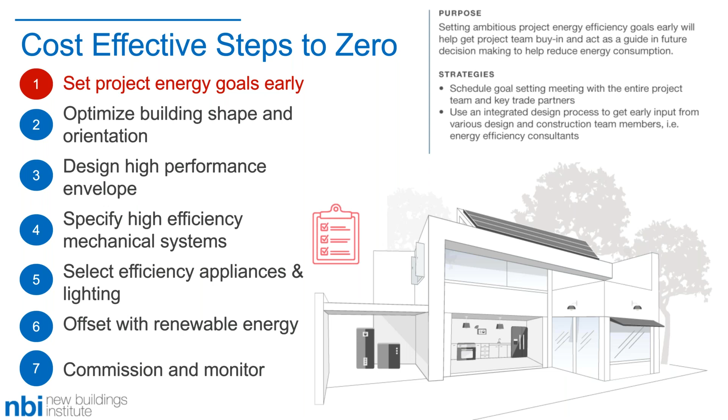The second step is to optimize the building shape and orientation. And this really starts with studying the site and looking at bioclimatic analysis, understanding the wind patterns, how much rainfall is on the site, what is the sunlight possible, and how can you take advantage of what's naturally there to light, heat, and cool the home. So how can we not use electric energy, but actually use nature to do what we need to do within the home? So simple shapes really help with constructability.

Sheridan is a great example of that. Trying not to be too complicated with the shape is often helpful, as well as looking at energy modeling, doing that energy modeling early, and making sure that you have the right orientation or the optimal orientation for your site and for what's possible for energy efficiency.

Another thing to consider is the solar budget. So once you've known your shape and you know what's possible, how much energy can you actually collect from solar on site? And with that information, it can help you also set a target for how much energy that building can consume over the course of the year.

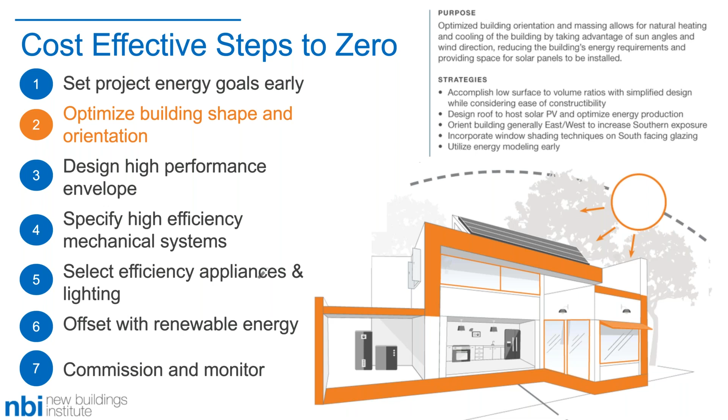The third step is design for high performance envelope. And the three most important things here to consider is a tight envelope, a lot of insulation, and minimize thermal bridging. And we do this all to reduce energy use and minimize the heat transfer through the building's envelope. Doing so allows us to reduce the HVAC size and minimize first costs associated with that HVAC system.

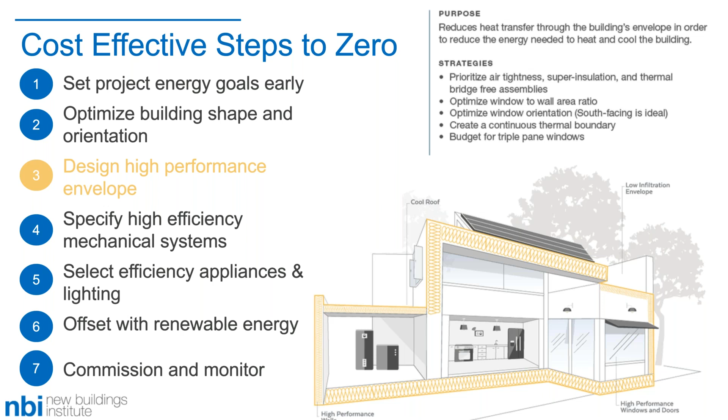We also want to look at the window to wall ratio and make sure that we are being intentional about the size of the windows, where the windows are facing, and minimizing any heat transfer through the envelope, or thoughtfully minimizing heat transfer.

Fourth is specifying high efficiency mechanical systems. As I said before, this really starts with the envelope. By making that envelope a tight envelope, we can minimize the infiltration through there and right size the HVAC system, saving first costs.

We also want to control for ventilation. In many cases, you'll see in zero energy homes that there's a separate heating system from the ventilation system. This is because in a tighter home, you need to control where that ventilation comes from. It's not just infiltrating from holes in the wall, but it's intentional. It's also important to consider comfort and health, so it's not just a matter of downsizing the HVAC system and telling everybody to put a sweater on, but making sure that it's actually comfortable and that there's proper ventilation to improve the indoor air quality of the home.

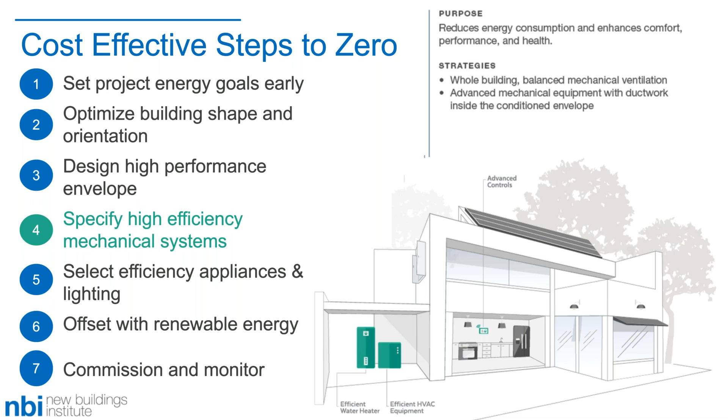The fifth step is selecting efficiency appliances and lighting. All LED lighting is pretty common these days. Most people know about Energy Star appliances and equipment, so those are becoming easier to purchase. It's also important to consider that when you reduce your heating and cooling, which is often the highest energy intensity in our home, that actually increases the pie of how much water heating and plug loads you're using. So you want to consider those as well.

With hot water, we're seeing more heat pump water heaters coming onto the market that are right priced for individual homes, as well as making sure that the plumbing is actually being designed. So the distribution of the plumbing is designed in a way that it's using less energy because you have smaller runs to each hot water source.

The sixth step is offsetting with renewable energy. Once the energy use has been optimized through steps 1 through 5, we want to offset that energy with renewables. This is where that early analysis really pays off, because we've taken a look at the site, we know what's available there, and we've optimized our building for efficiency.

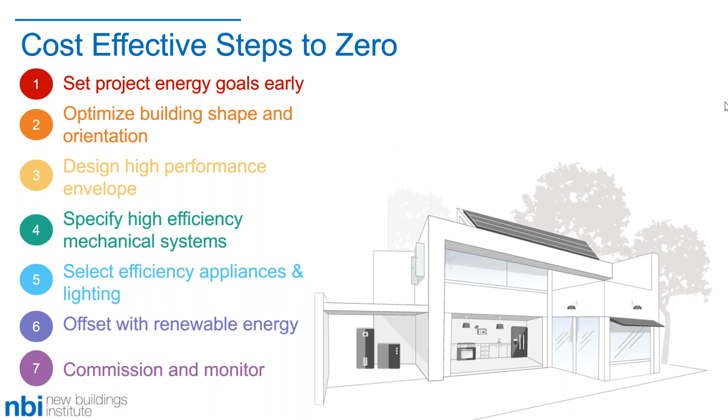So these are the 7 steps to cost-effective zero. As I mentioned, these are some of the essential things to consider. There's many more, and we'll get into that next with the case study. So I want to hand it over to Jonathan right now so that he can share more about the Sheridan case study.

Thank you. Thanks, Webly. Good afternoon, everybody. I just want to give a quick introduction to the rest of our panelists. I'm joined with Haley Hardwick Whitman with One Neighborhood Builders, and she's a Rose Fellow, and John Erickson with CLEAResult, who is our verifier and acting as our passive house consultant. My name is Jonathan Knowles. I'm a professor of architecture at Rhode Island School of Design and an architect with Briggs & Knowles Architecture and Design in Providence.

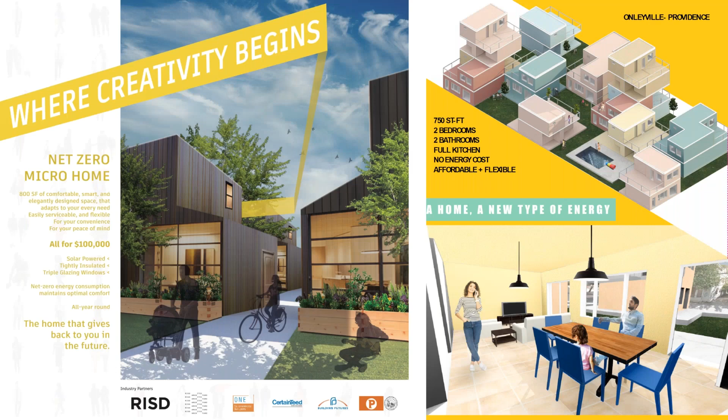This project really started with the city reaching out to the Department of Architecture at RISD because of our successful relationship with a number of other projects. They were looking to consolidate unused lots in the city and turn those over to not-for-profit developers to establish zero energy affordable housing, which is a really admirable goal and one that led me to start a design studio working with the city. And the city introduced us to One Neighborhood Builders, the developer and contractor, to actually get this done.

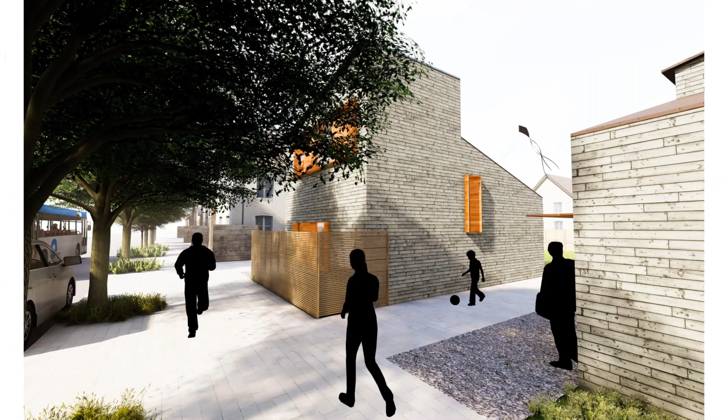The studio started with 2 teams. We looked at houses as modules and in aggregate, so they could actually join together if need be. This is the first unit, so we're calling it now Unit A. This is the first team and the second team of the 2 prototypes.

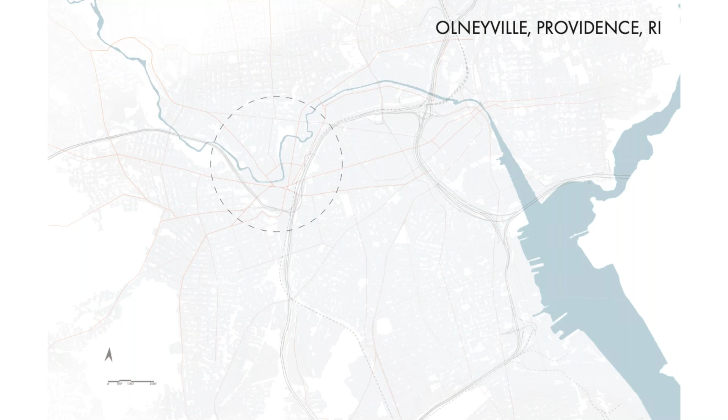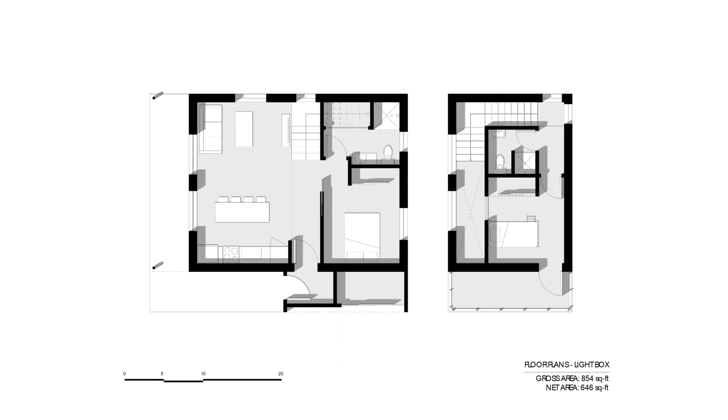The plans are actually very straightforward, but generous for a 950 square foot home. We have a great room, master bed downstairs and bath, full bath, and then upstairs we have a smaller bedroom and a half bath at the top of the stairs. You can see our model, 2 big porches, one to the south and one off the bedroom on the second floor, that could potentially be filled in to become a sunroom.

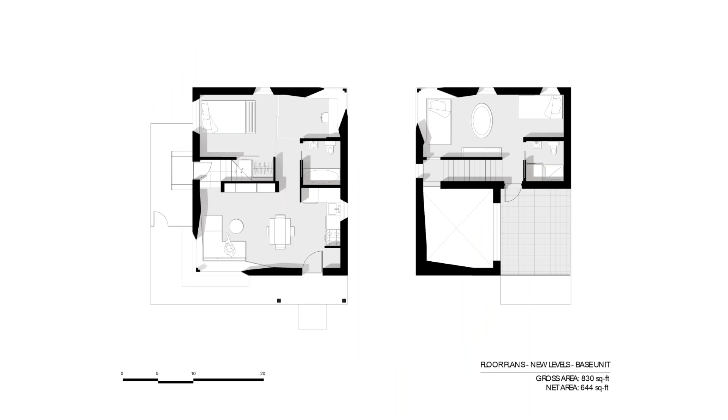So this was something my students were interested in, is how these houses could transform over time. The second prototype was called New Levels, and again, that was based on a project that could change over time. You can see a large double height space in the living room and a large second floor terrace, and their idea was that this could be infilled in the future.

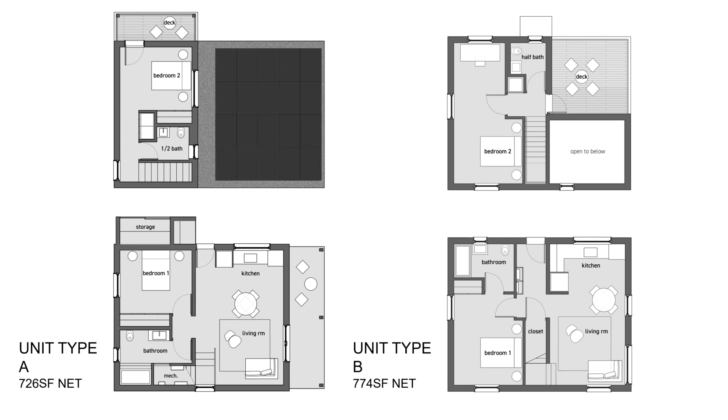And become either a ground floor apartment and an upstairs separate unit. The projects have evolved a little bit, but not that much to current. You can see they're very similar, Unit A on the left, Unit B on the right. They're still roughly about 950, 960 gross square feet. Unit A is now almost done. Unit B is slated to be done this spring.

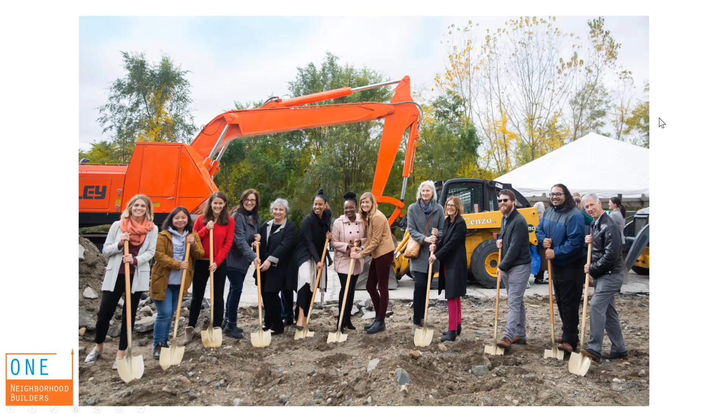Hi, everyone. My name is Haley Hardwick-Whitman. I'm the general contractor and project manager of this project for One Neighborhood Builders. This is a picture of us, our organization at the groundbreaking last fall.

One Neighborhood Builders is a community development corporation that develops affordable housing and works to engage the community in the greater Providence area to cultivate healthy, vibrant, and safe communities.

So these were the main goals of the project: to ultimately serve as a replicable model for the future of affordable housing. We wanted to demonstrate that sustainable, healthy homes can be attainable for everyone.

We are also trying to address 4 realities within the housing market. The first one being that larger homes and larger plots of land are expensive to build and maintain, especially in the urban core area where we are in Olneyville, due to property taxes, which add a substantial burden to housing affordability. The second one being the gap between available public subsidies and what it actually costs to build or buy a home affordably is just expanding.

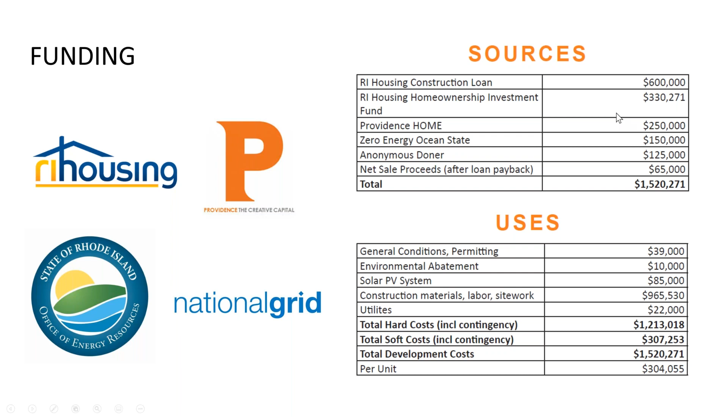costs are typically geared towards 120 AMI and above. So although the small homes were designed with small lots in mind, a recent HUD neighborhood assessment had been completed and deemed this area at 35 Sheridan Street to be underutilized, and it was a priority for Olneyville to revitalize. It's adjacent to the Woonasquatucket River bike path, which is a great asset for the community, and this area was just vacant brownfield.

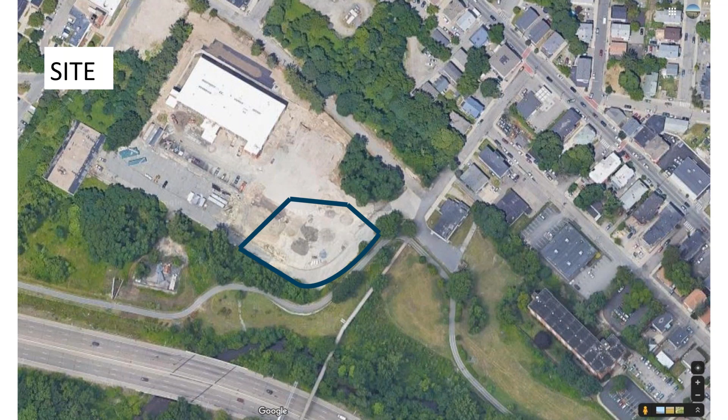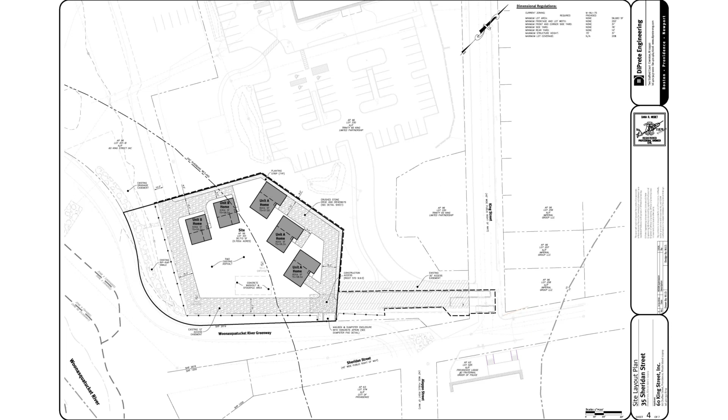So the students had conducted some preliminary solar studies once we chose this lot to help determine the placement of the homes. This arrangement was further refined to create an inclusive semicircle shape so all the neighbors could be visible and have access to this shared green space in the middle.

So we ended up with 78 panels total, and each panel is 320 watts. So the entire system is 24.96 kilowatts.

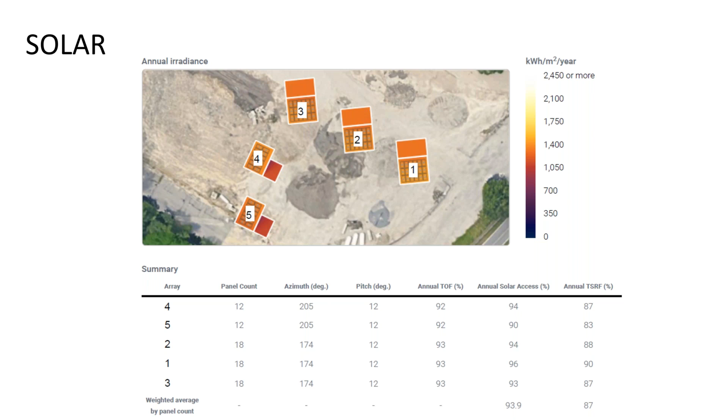This project, as you can see by these numbers, is projected to be net positive energy. It's estimated to consume 5,568 kilowatt hours and estimated to produce

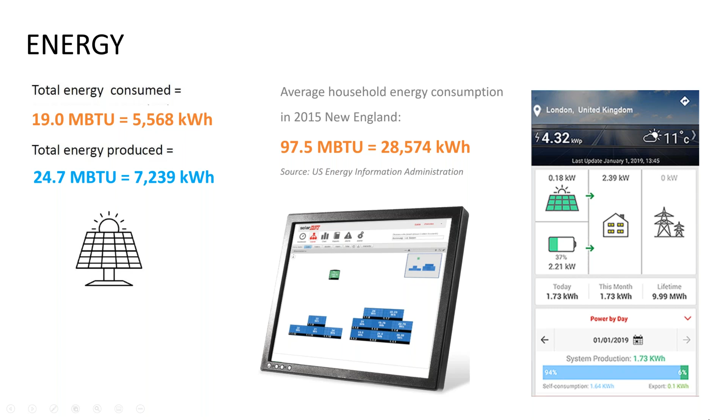Then the next section, we're going to go into the main building elements that allow for the project to be Passive House certified as well as net zero. I'm just going to give an overview, and then Jonathan can explain how they're implemented.

So optimizing solar gain for the climate has to do with selecting the right window performance that makes sense for orientation. Continuous insulation means minimal thermal bridging along the building exterior, or building envelope. Having an airtight building enclosure—John will talk about blower door tests that we conducted. Balancing the heat and moisture recovery ventilation: having a really tight building, it's important to have really excellent air exchange, which we do through our ERV.

And finally, having an efficient, minimally sized active system lessens the energy demand on the project. One additional feature, if you'll notice in the diagrams, is the shallow frost footing, which many municipalities are unfamiliar with, but the City of Providence approved. That resulted in basically a slab on grade with an insulative skirt, where we didn't have to go down 4 feet to the frost line, but went horizontally 4 feet to take advantage of the Earth's energy. This was somewhat unique because it's a major cost reduction measure for a passive house.

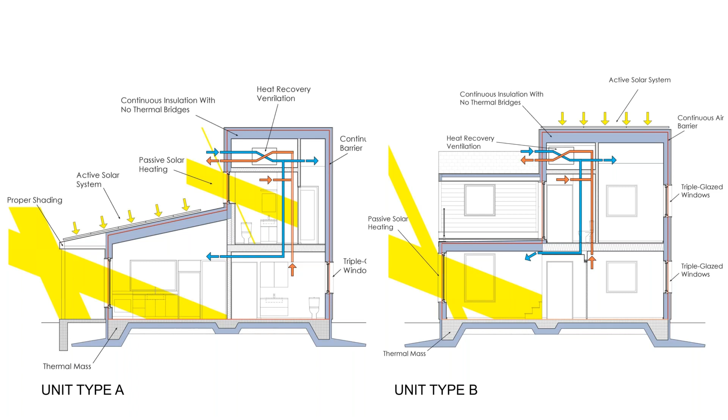So we'll pass it off to John Erickson, who's been working with us on site with the contractors to ensure the passive house details are implemented.

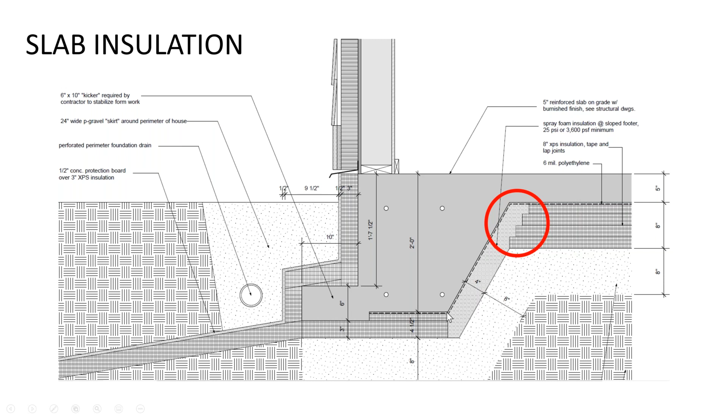So Jonathan mentioned the frost protected shallow footing, and here's his detail. You'll see this wing of 3 inches of XPS that essentially moves the frost line closer to the surface. On this detail, you can see R40 underneath the slab, and then R15 around the perimeter here.

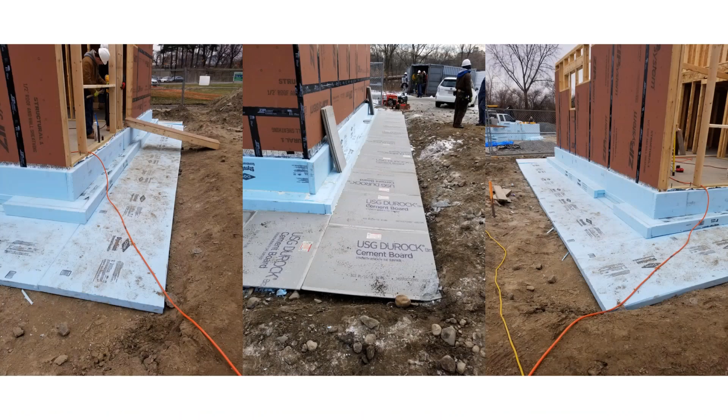In order to get this correct, they used spray foam on the perimeter like this, and out in the field you can see the 2 inches stacked, 4 sheets stacked of 2 inches for R40 out in the center. Here's a photo of the wings that Jonathan mentioned on the footing before it's backfilled, so you can get an idea of what that looks like. You can see the cement board on top that serves as protection, but that cement board also comes up the side and can be used later for applying the stucco coat to the exterior of the footing of the slab.

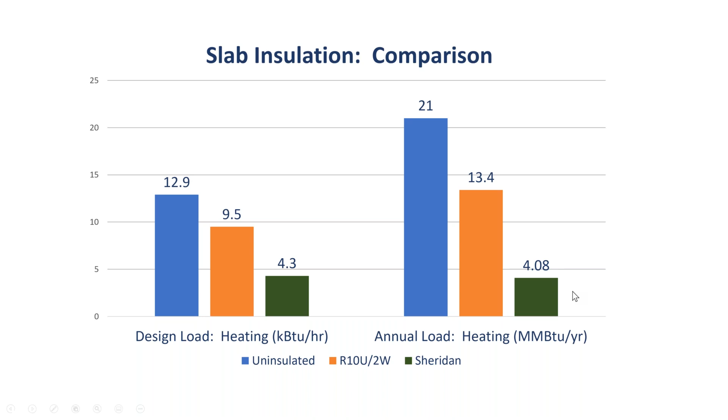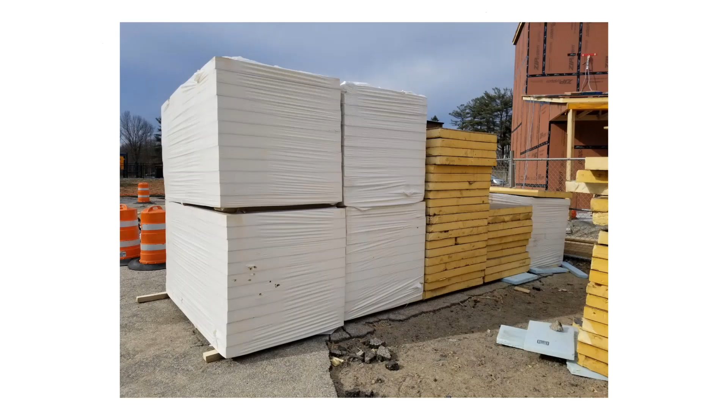Another factor to building this robust shell is not just using a lot of insulation, but making sure you've got a layer of continuous insulation included somewhere in the assembly. This was accomplished with 4 inches of exterior polyiso on the outside. For this project, one neighborhood used a company that sells repurposed polyiso that they pull off of commercial buildings.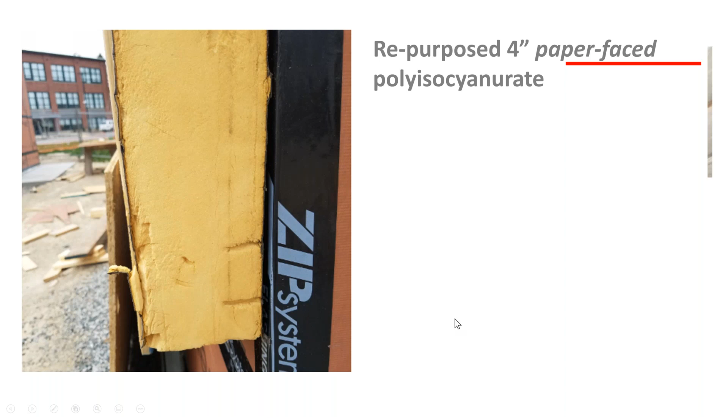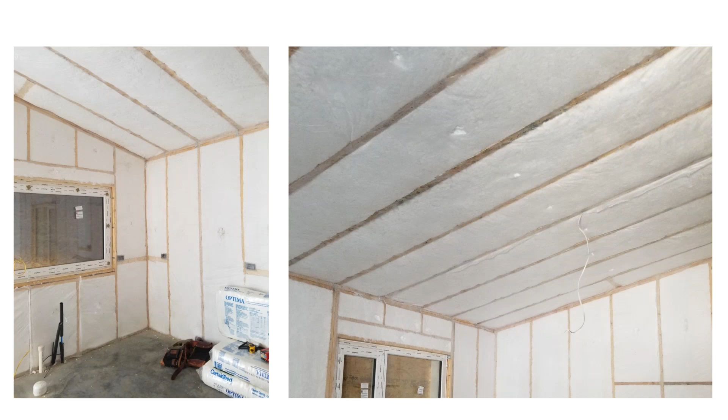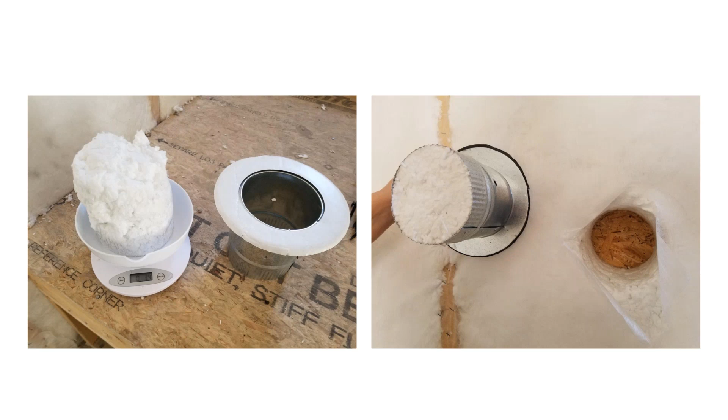So the interior framing insulation is blown fiberglass. With the fiberglass, as with all dense pack products, you want to weigh it and make sure it's being installed at the correct density, because the density affects not only the R value, but if it's installed too loose, it can settle and create gaps up at the top of the framing bays.

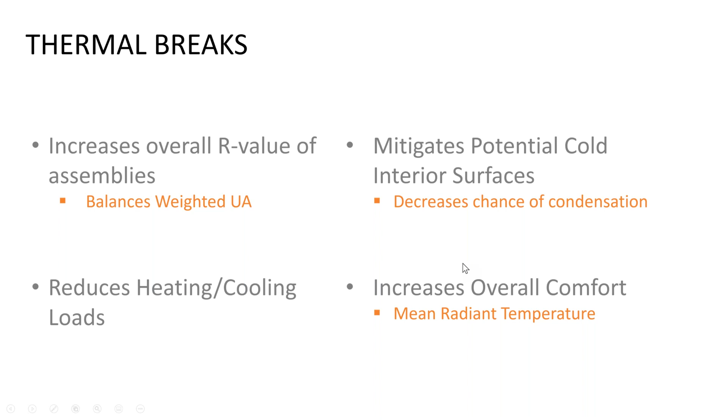Regarding the importance of thermal breaks, which Webley mentioned earlier - when you're creating thermal breaks, yes, you're increasing the overall weighted UA of an assembly and reducing loads, but you're also mitigating cold surfaces. For Passive House, they recommend that your interior surfaces are no greater than 7.2 degrees Fahrenheit from your thermostat set point. Putting in good windows and mitigating these thermal bridges is how you achieve that, and the end result is that the house is going to be much more comfortable.

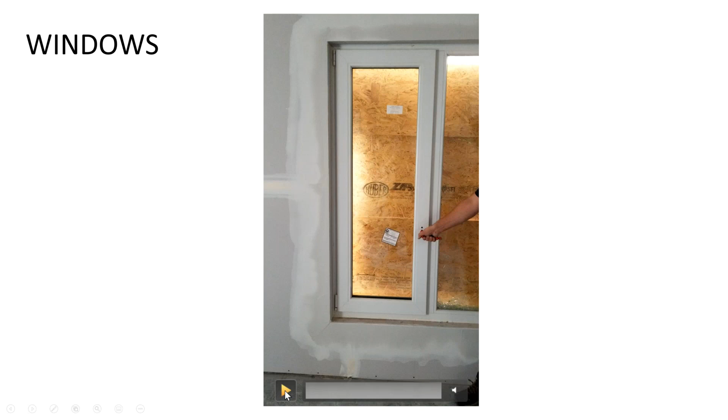This is an example of the windows installed at Sheridan, which is a Zola UPVC window. This one is a tilt and turn. We put together a short video to show you how these windows work. These windows are manufactured in Poland.

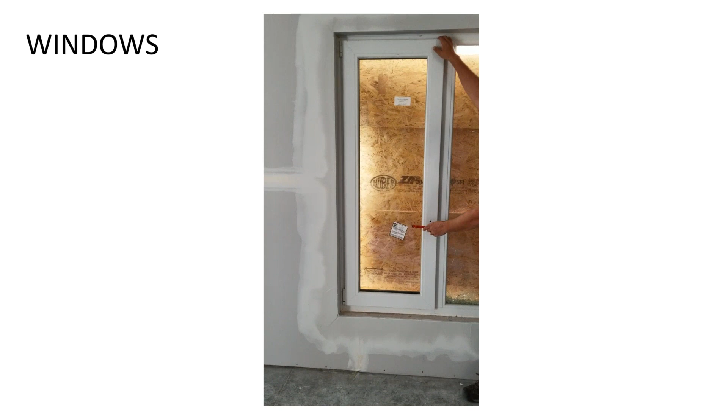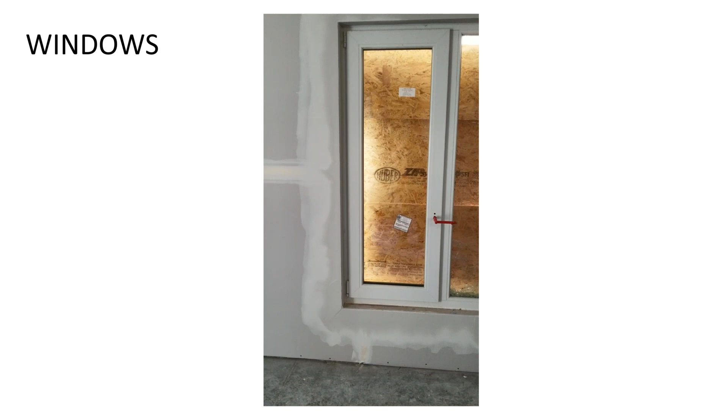The nice thing about these windows is that you can vent the house when it's raining outside by just using the tilt feature.

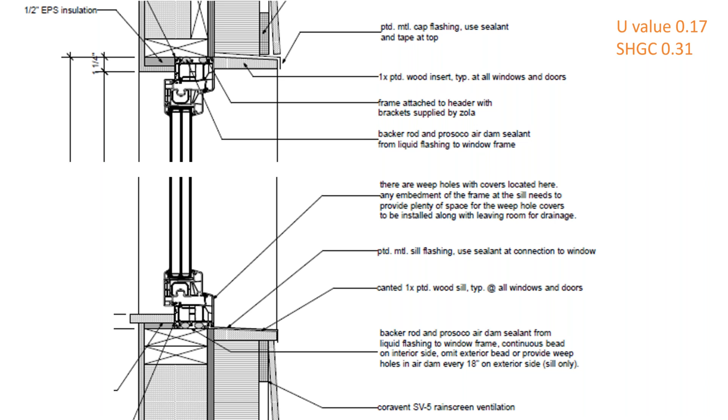One of the other really important pieces to lowering your loads and creating a very robust shell is having a very sound air barrier that is continuous. For Passive House, the air tightness requirement is 0.05 CFM50 per square foot of shell, which is a very low number for most traditional builders.

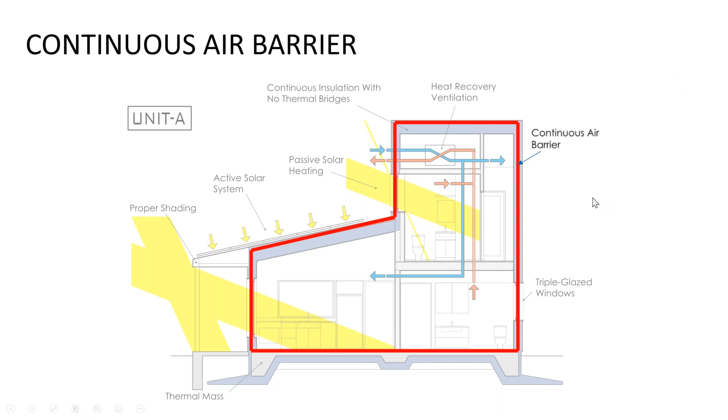In order to achieve that at Sheridan, the technique they used is the air barrier goes up and over the top using zip wall and zip sheathing. So the only place to be concerned about accidental air leakage, once you have all of the walls and ceilings taped and positively air sealed, is the connection between the sill plate and the concrete.

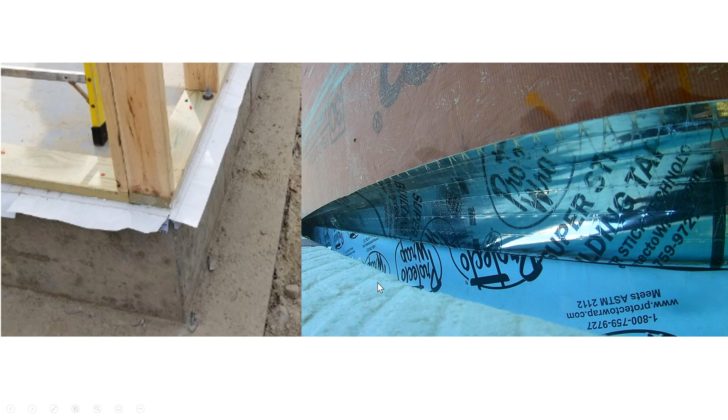What they used here is this product called Triple Guard, which is a traditional sill seal, but it's got two folds of tape, one that comes up onto the sheathing, one that goes down to the concrete. You put the sill seal in between, you can see it here, between the plate and the concrete. Once you have your sheathing on, you stick this tape up and down, and now you've got a solid positive connection between those two materials.

Sill sealer alone will eventually not work as well as when it's originally installed, because the wood will shrink. So this is a positive connection that you know will last.

So these are my midpoint blower door numbers for the first three buildings. Building 1 was 96 CFM, building 2 was about 62, building 3 was 43. You can see that the building practices are improving as they go, and they're picking up, figuring out where they're making mistakes.

By the way, this 43 CFM is a very, very low number. This is an excellent midpoint blower door number, much lower than the allowable maximum, which for this particular house is about 177 CFM, which is good because they'll be adding more.

This is a shell test. This is the house plywooded and taped with no windows and no doors, essentially, and obviously no other mechanical penetrations. So as they add windows and mechanical penetrations, there's going to be more leakage. You want to make sure you have this nice buffer so that you stay underneath that 177 CFM.

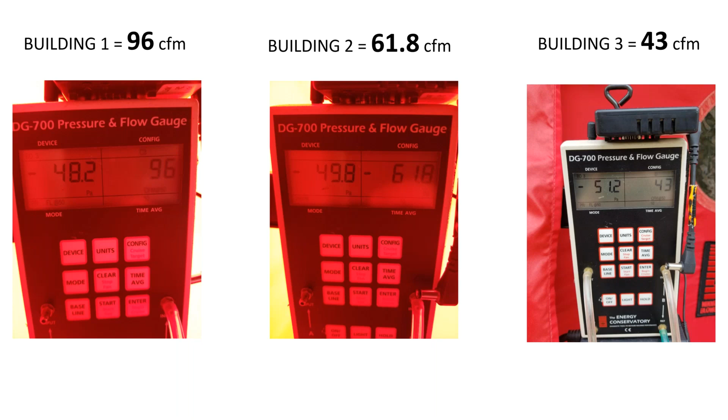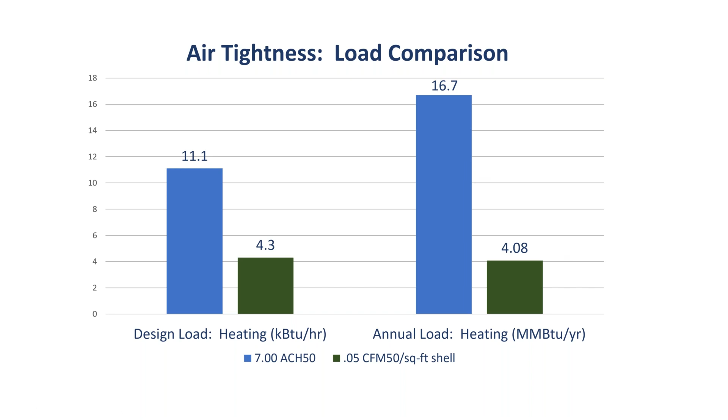I did the same thing for air tightness. Everything else being equal, if you set these houses at Rhode Island code minimum, which is 7 ACH50, these are the differences in the design load and annual loads. This is remarkable to me: this is a 12 million BTU reduction just by building to passive house air tightness standards.

This is the effective leakage area. If you were to take all of the leaks and holes in the shell and combine them into one hole, how big would it be? That is called the effective leakage area.

Over here on the right, you can see if you added all the holes together in the building that blew 43 CFM, that would be about 2.4 square inches. The maximum allowable for PHIUS is about 9.7 square inches, and the Rhode Island maximum allowable for code minimum is almost 58 square inches, which is almost like having an open window, or at least a halfway open window. So it's a huge difference, let's say that.

And you can see what that means to the loads in the last slide I just showed you.

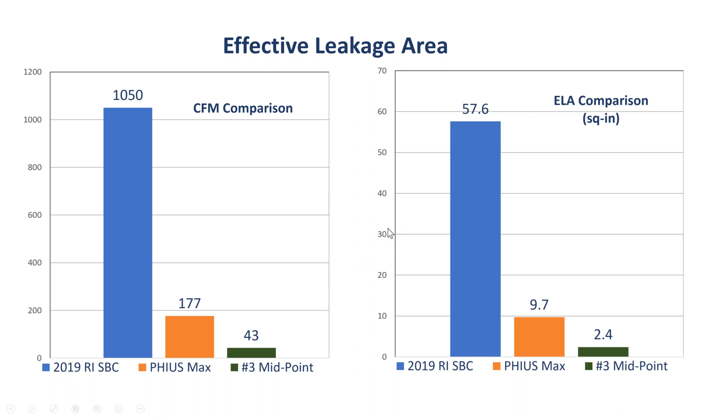Mechanical ventilation is required not just for PHIUS and really tight houses, but it's essentially required for pretty much all new residential construction. Here in Rhode Island, the mechanical code states that if you blow a 5 ACH50 or less in your house, then you need to have mechanical ventilation of some kind.

So this type of ventilation is not just for really tight houses, but in a passive house and in really tight houses, it becomes sort of extra important.

And the strategy at Sheridan for ventilation is this ERV, which is stacked above the second floor bathroom, centralized in the house so that the duct runs could be as short and straight as possible.

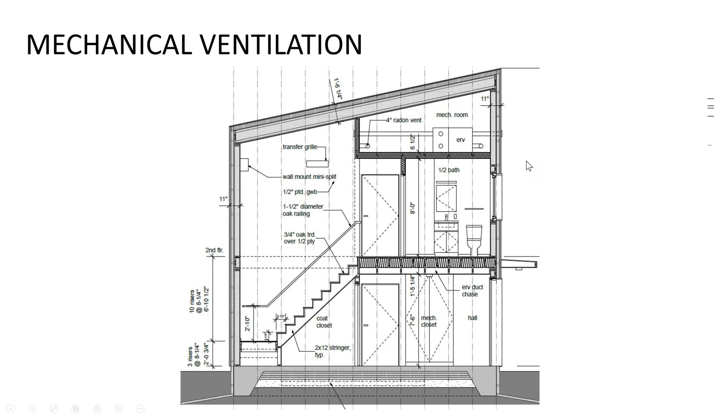Another nice detail that Jonathan included in this design is that the exhaust and supply are around the corner from each other. So it's a nice detail to keep them apart that way.

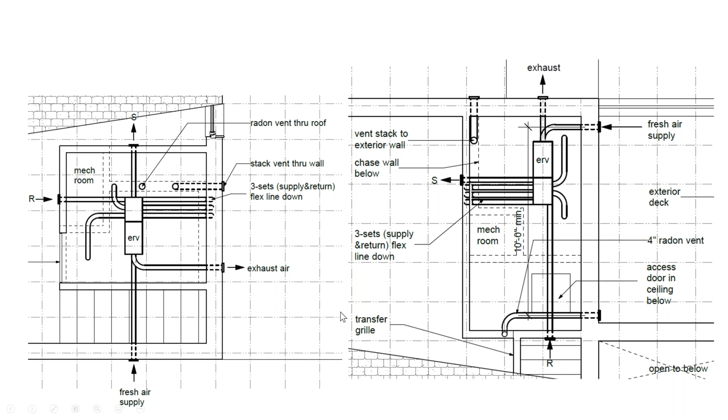But the reason you want to have short, straight runs in your ventilation system, in particular why it's so critical for passive house certification, is because there are requirements for your ventilation system exhaust for your bathrooms and for your kitchen, and you need to hit those numbers.

It's 20 CFM exhaust or 50 intermittent for bathrooms, and 25 and 100 for kitchens. If you're not getting those exhaust numbers in your bathrooms and kitchen and you need to boost up your system, that's going to, number one, use more energy to run the fan at a higher speed, and number two, bring down the efficiency of the entire system, which is going to hurt your energy model.

So here, there were a few mistakes with the ducting at Sheridan that got corrected. You could see this long, unnecessary sweep and these couple extra 90s here. You want it to look more like this, nice and straight, a single long sweep like this.

This way you're reducing friction in the ductwork, and hopefully you're able to run your ERV at the lowest setting and still achieve the exhaust flows that you need.

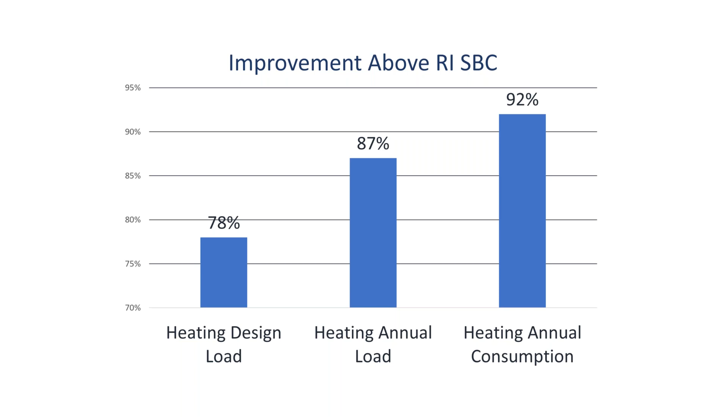So this is without solar panels, and this 92% reduction in annual heating consumption is pretty dramatic when you consider that the main thing happening here is very airtight construction, extra insulation, and good windows. Those are kind of like the big three things that are making this number so high.

So I did a quick little calculation on this because I thought it'd be interesting. The amount of energy that would be needed to heat one of these houses set to state code minimums for 50 years would heat the same house at passive house certification for 580 years.

And the projected annual cost for heating one of these houses is about $126 a year. And I think that's it.

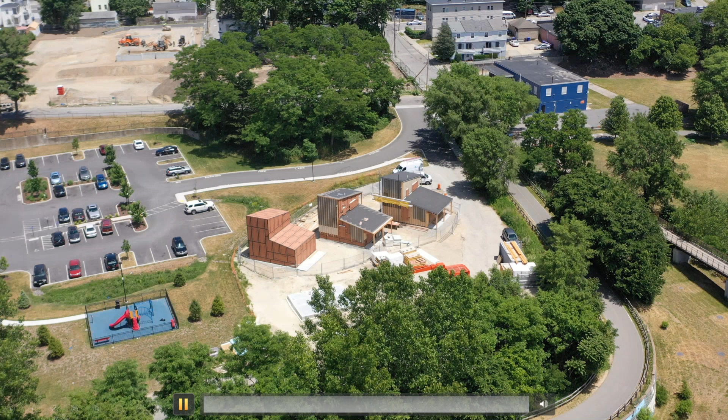This is a drone video that we have of the site here that I'm going to start. And I think that now is a good time for questions, maybe.

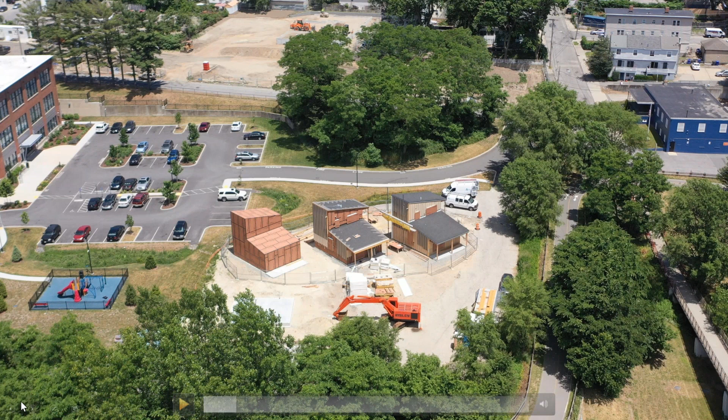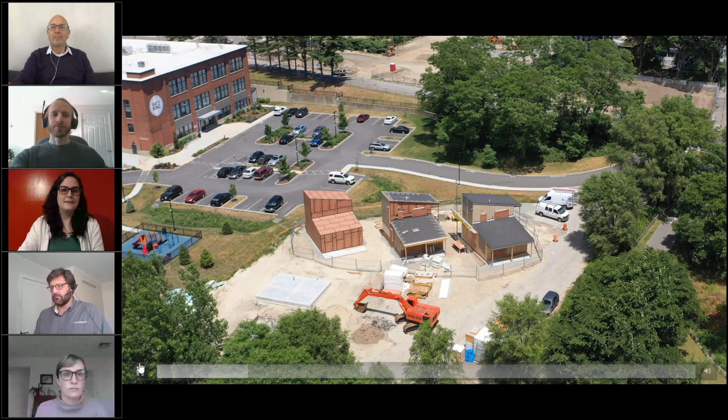I have a couple of questions that have come in. The first question is for Haley. Haley, what are some of the unique features that have been important to educate the home buyers about the homes?

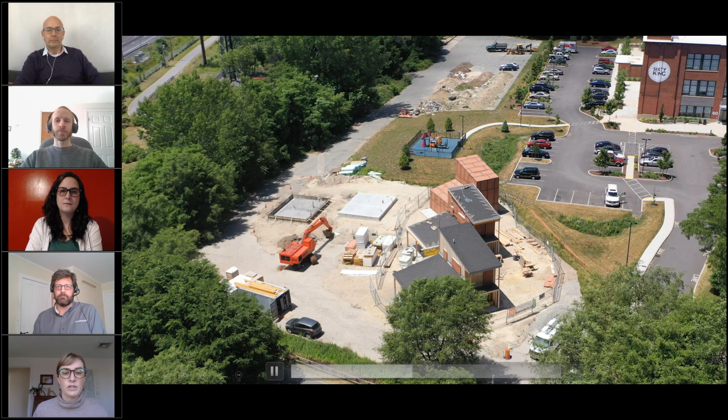That's a really good question. Before I started, One Neighborhood Builders conducted a few focus groups to explain our concept and get feedback from the community in terms of shaping the design. As they've been built, people bike by and stop to ask questions, and everyone thinks they look really cool, but there's a knowledge gap. People need to be convinced that less space is better, because the American dream is bigger is better. So the main hurdle was explaining that you're getting a really high quality home with amazing energy efficiency and air quality that will last forever. It's quality over quantity that we're trying to convey.

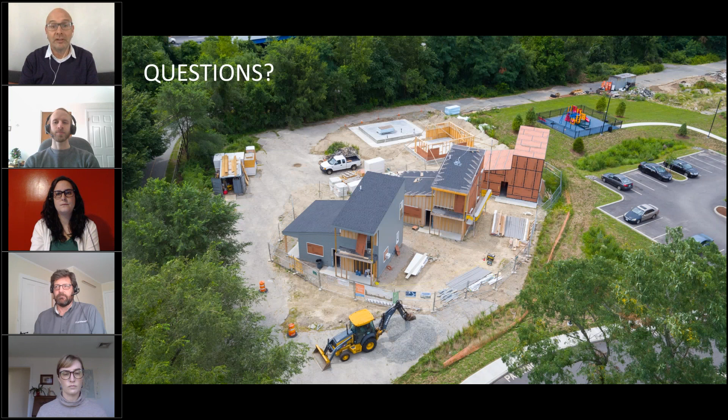Great, thank you. Second question is for Jonathan: what design obstacles made it more difficult to design to zero net energy? It really wasn't any obstacles, it was a goal from the beginning. As you outlined in your 7 points, we did exactly that. Our students were running WUFI Passive all the way along to make sure we hit our targets. We didn't send it into Passive House US until the working drawings were complete for certification, but we were using the design tools throughout. It is a little difficult to do a passive house with such a small volume, but we've done it, with the 3 simple strategies: airtight, super insulated exterior, and really good windows. One Neighborhood Builders was on board, and we were able to get it done.

So I have an added obstacle - working with Building Futures, which is a training program. This was their first passive house. So before we even started, we had John Erickson come in and review some of the atypical details they were going to be constructing, which is different and may seem over the top from the way you conventionally build. So John, did any of the team members from Building Futures struggle with any of those details?

Well, I think that they knocked it out of the park, to be honest with you. If you think back on the slide of the midpoint blower doors that I did, where they were getting progressively better, starting from 96 CFM and moving down to 43. Even that first building at 96 CFM is still half of the required minimum for passive house allowable, which is excellent for a first-time build. And then 43 CFM on a midpoint, that's a really, really low number. That might be, from my experience, the lowest one I've seen so far anywhere. So it's excellent.

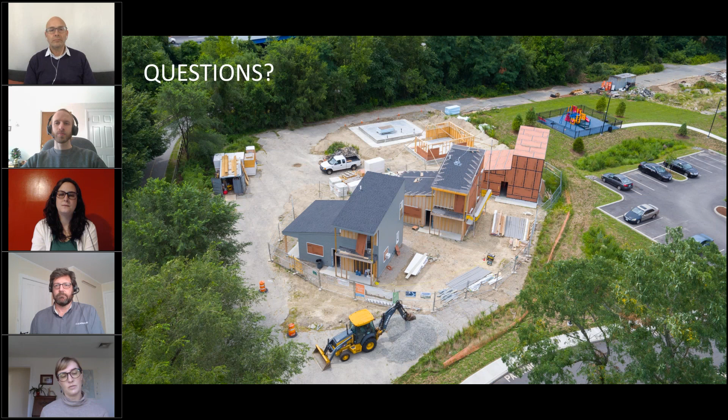Yeah, I mean, I can speak to using the recycled 4-inch polyiso on the exterior. So we were originally, Jonathan had designed it to do 3 inches of mineral wool, but we couldn't attain the R value that we needed to. So we unfortunately had to go to the polyiso, but doing the reclaimed polyiso kind of made us feel better about using that product, and it also was about a quarter of the cost.

So for the exterior insulation for all buildings, I got a quote that was like $80,000, and we got it down to like 17 or something. So we're pretty psyched about that. Wow.

That is the last of the questions that I see here. Connie, did I miss any? I'm scrolling through them. We just have one about the cost. How does this cost compare to normal construction?

Yeah, so the cost is pretty comparable. The area where it becomes, or people kind of get turned off from building this way, is the fact that they're small homes. The cost per square foot seems very high. But like I said, with a conventional house, you're getting maybe like 1,500 square feet as opposed to 900 gross square feet for these guys. But yeah, it's just a much higher quality product and higher performance.